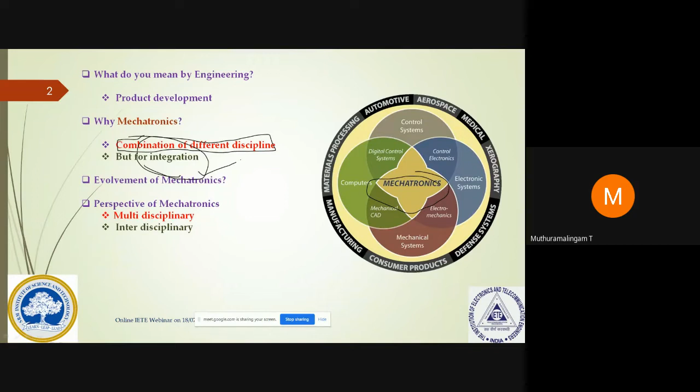However, the main important definition of mechatronics is not just this, it is integration. There should be some person needed to integrate the different engineering disciplines. It is not only combination, but how to integrate, because each and every engineering discipline has its own energy. If I want to connect mechanical with electronics, I simply cannot integrate them directly, because both are different forms of energy. So I need to introduce something which integrates both mechanical with electronics.

So in such cases, only mechatronics engineering is coming into the picture, and it is evolving in the right manner. What about the evolvement of mechatronics? Frankly speaking, in the last 20 years, people in all industries have been using mechatronics, but without knowing the name is mechatronics.

Even before 15 years, if anybody asked about mechatronics, people would ask, what do you mean by mechatronics? In my own experience, while doing my BTech and MTech in mechatronics, whenever we approached companies during placement, the industry people would ask which department we belonged to. We would say, sir, mechatronics. The first and foremost question we faced was, what do you mean by mechatronics? That was the condition once upon a time, but now the trend is changing.

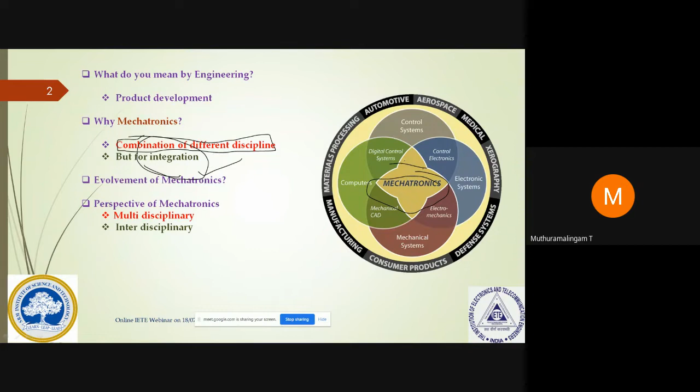Even here you may be able to see this - this is a digital control system, control electronics, everything combined together. This particular part belongs to control engineering as well as digital control system - it is interdisciplinary, a combination of departments which develops a newer perspective. Whereas multidisciplinary just takes the essence and integrates it. So mechatronics is multidisciplinary as well as interdisciplinary in some cases.

These are the definitions for mechatronics provided by various institutes - interdisciplinary, by the Applied Mechatronics Association, as smart electrical mechanical systems. By Chico State University, it's a field of study that combines fundamentals of mechanical, electrical and computer engineering. Then Clemson University gives their own explanation - the blending of software and hardware for design and analysis of advanced control techniques. Design with Microprocessors for Mechanical Engineers describes it as the science that integrates mechanical devices with electronics.

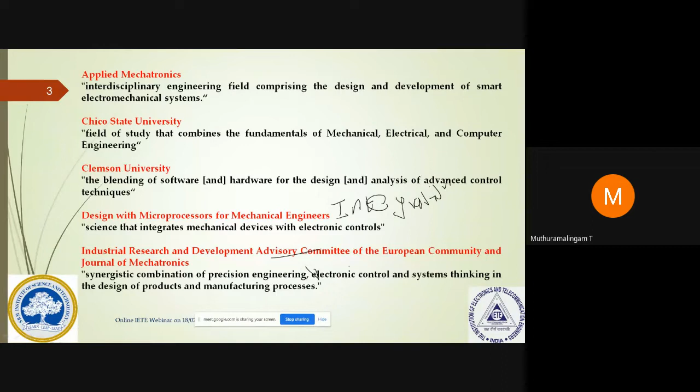While analyzing each different definition, the final concept is only one thing - integration. So if anybody asks what do you mean by mechatronics, instead of saying it's a combination of mechanical, electrical, electronics, we can say it is integration - integrating different engineering disciplines. And this is the French standard, actually, this is mostly accepted in mechatronics engineering - the French standard NF E 01-010. They state it is synergetic integration of mechanics, electronics, control theory, and computer science within the product design.

Actually, this is important. Integration is one keyword, and the second keyword is product design - I'm integrating to get some product in order to improve and optimize its functionality. As we already discussed, mechatronics is not purely multidisciplinary and also not purely interdisciplinary.

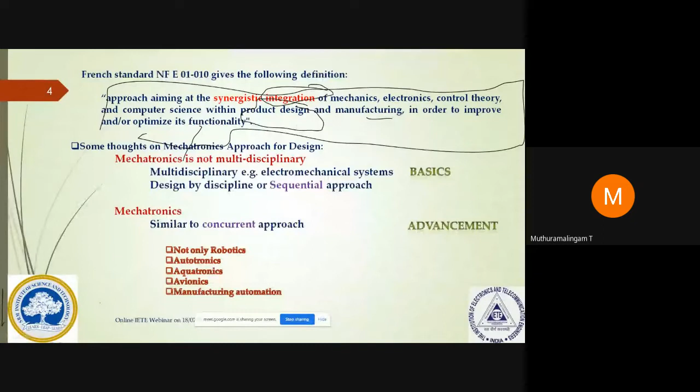What's the main difference? Multidisciplinary is a sequential approach - first complete the mechanical, then complete the electrical actuator, then go for electronics, then go for coding. There's a sequence for each different block. However, mechatronics is concurrent - I need to do the entire thing in parallel.

So generally, the sequential approach based mechatronics I can term as basics, whereas concurrent based mechatronics I can term as advanced mechatronics. These are general terms, not approved definitions - they are unofficial definitions for basic mechatronics and advanced mechatronics used by mechatronics engineers.

Also, if anybody asks what do you mean by mechatronics, they often aim only at robotics - dealing only with robotics. But it's not only robotics - automotive electronics, aquatronics, avionics, manufacturing automation, all come under mechatronics. However, as we know, out of these 5 categories, robotics now has a very unique as well as predominant importance among the technical fraternity.

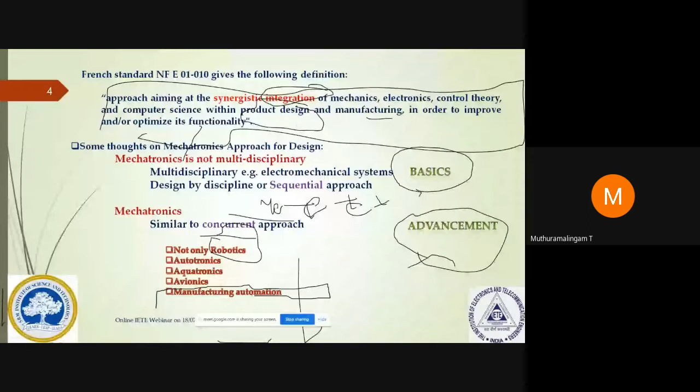Out of these 5, my specialized area is manufacturing automation. And for people going further, to interest some students, I want to show some video.

You just see the manufacturing automation. In manufacturing perspective, in machining side, what are all the mechatronics knowledge is needed? You just see that.

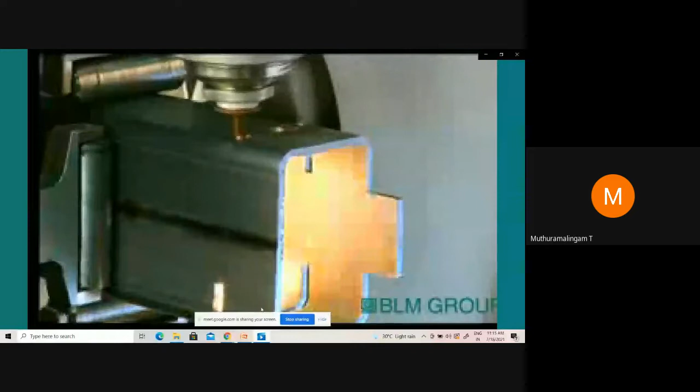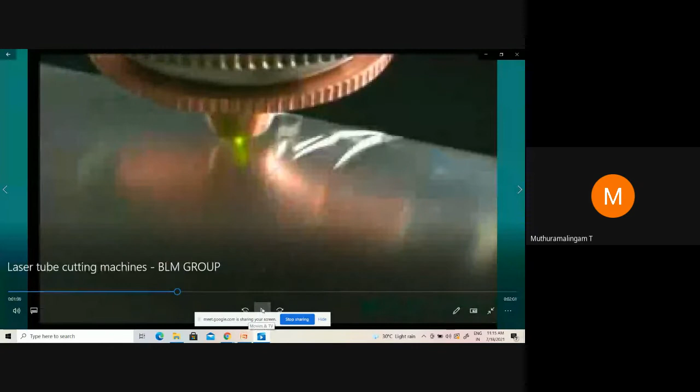This process contains not only the movement of the tool but also the tool trajectory for making an engraving, where the tool has to move, in which way it needs to move, what speed it needs to move, what should be the position. Each and everything is controlled by the mechatronics approach only.

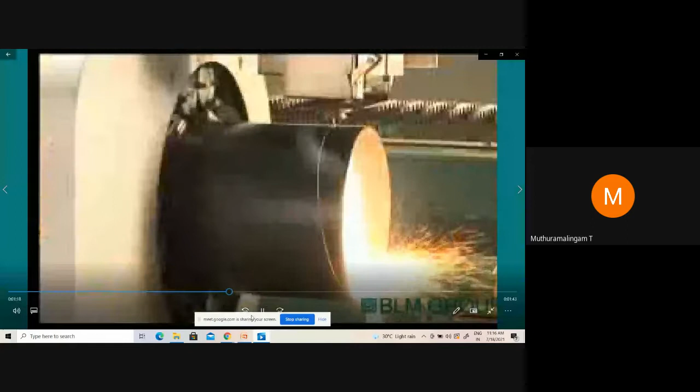And let me show about the Boston Dynamics robot animal.

You just imagine the stability. Actually, it is 10 years of hard work of Boston Dynamics.

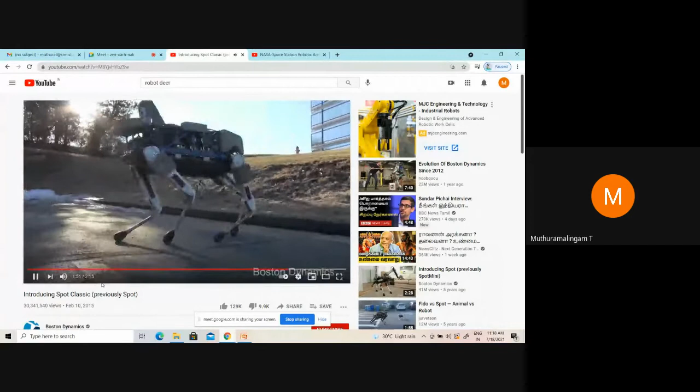And one more important example, which is told by even our today's guest, Professor Ramesh told. You just see that. A space station robotic arm. Actually, you know very well, International Space Station.

In International Space Station, whatever things are required for the astronauts available in the spacecraft, they will send through a vehicle. Those vehicles will be grabbed by the robotic arm, which will be on the outside of the International Space Station. They will take it and observe it.

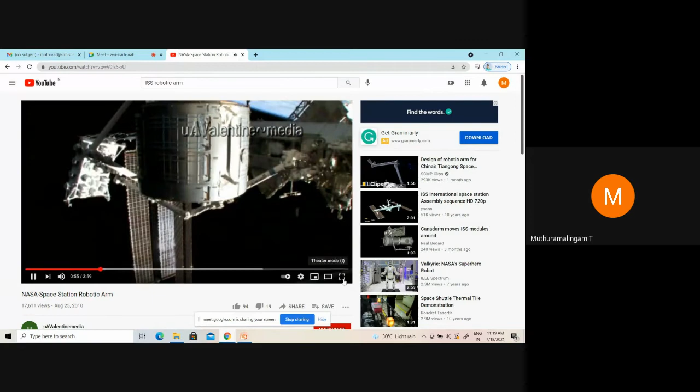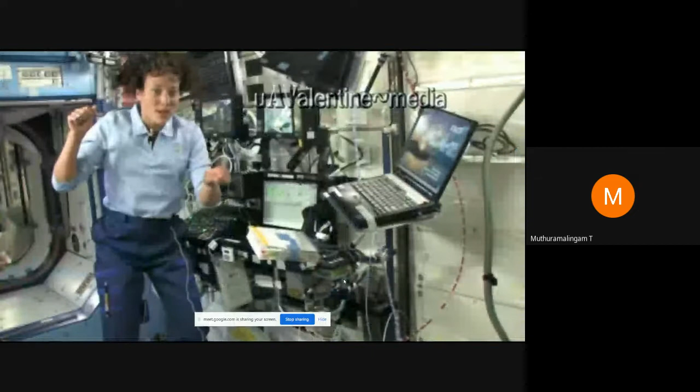It has extra joints, and I'll talk more about those joints. It also has the ability to move on the mobile base system back and forth on the truss and to do what we call a walk off, which is to go from one power data grapple fixture to another power data grapple fixture and basically act like a little inchworm. Grapple one, release the other, grapple again.

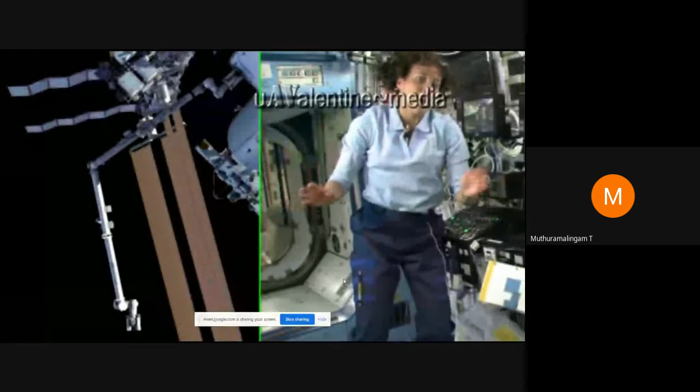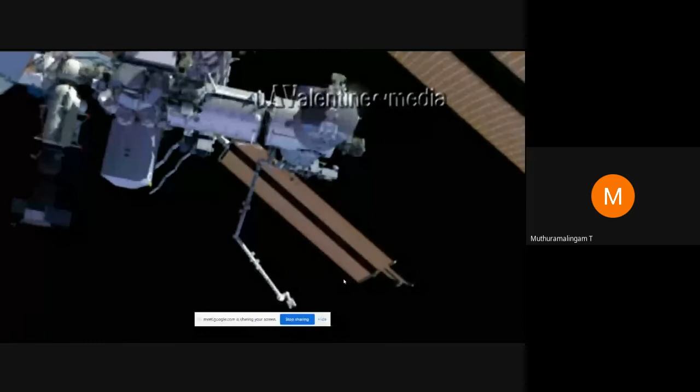The station arm has a shoulder, but that shoulder looks exactly like the wrist. In other words, one end is exactly like the other, and both are able to do roll, pitch, and yaw. That makes it so the arm can basically go in a big 360. The elbow, unlike my elbow, can actually go all the way, flip through straight, and come back on the other side.

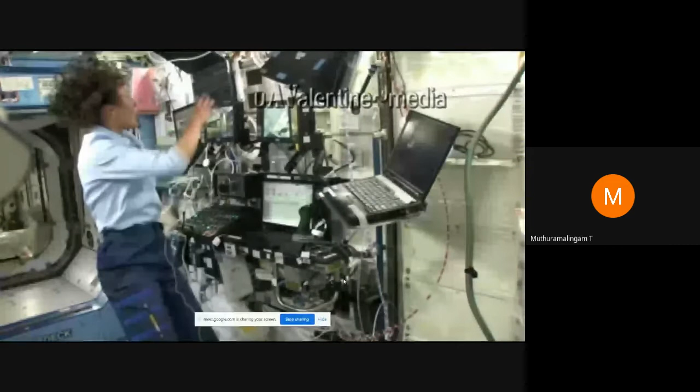This robotic workstation uses a lot of monitors because there are no windows that you can do your robotics out of. We also use computers. Some of them are used for our procedures. Some are used for additional views. And some are used for a computer program that is basically like a virtual reality.

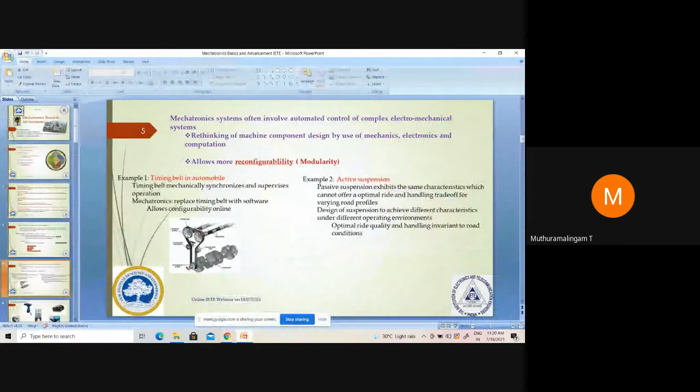Okay, so those are some real-time examples where mechatronics exists. So mechatronics often involves automated control of complex electromechanical systems. It's rethinking of machine component design by use of mechanics, electronics, and computation.

And this is the main important characteristic of mechatronics: reconfigurability. It can also be seen as modularity. Even we have this concept of modularity kitchen, modular kitchen. Modular kitchen is nothing but whenever I want to change the interior decoration of the kitchen, I can change it. I can upgrade whenever some new technology comes. I can upgrade myself, upgrade the kitchen.

The same way, as we know, any product, based on customer requirement, every year the product need is changed. Every year, even the iPhone, they are releasing new editions. How are they inventing new editions? They keep observing the customer requirement. They get feedback from the existing user, from them. What are the things we still need to change? Like that, they ask the customer. Any customer is the end user. They let them know, okay, these are things we still need. So based on the need of the customer, every time I need to upgrade. So that is known as modularity, as reconfigurability.

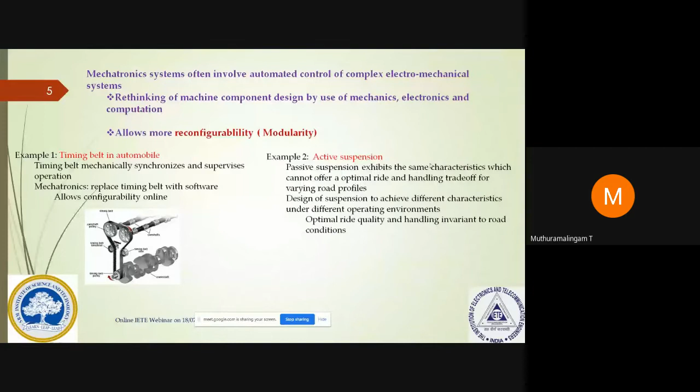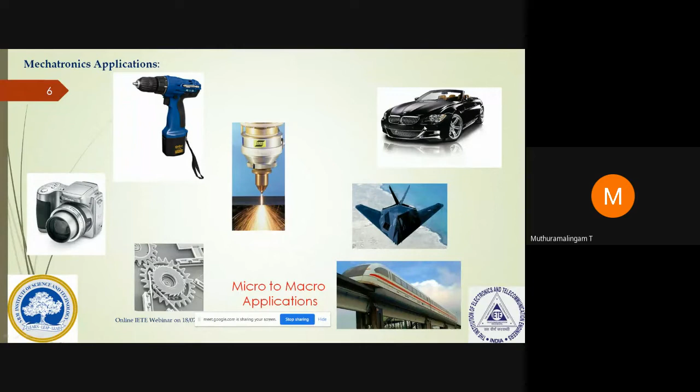We are getting some very favorable results. And these are all the mechatronics applications, from micro to macro level. From micro to macro level, there is speed available. The tool side, automotive focus camera, gears, micro MEMS technology, machining technology, car, stealth bomber, high speed train. Wherever you go now, mechatronics is coming into the picture.

In micro machining, this is a desktop sized factory. It's a machine, the CNC machine drilling image. It's a desktop type factory which can build a small part with a small factory. So if I need to make a very small minor product, why do I need to spend a huge amount to purchase a full CNC machine? Instead of that, why can't I purchase a small desktop size factory? By using those concepts, this is coming into the picture, and this is a micro factory drilling unit.

It's a drilling unit. Actually, it may look like a motor, but actually it's a drilling unit. We may see a larger drill available in the conventional lathe, but using piezo, why can't we make a micro factory drilling unit using that concept? This part, this thing.

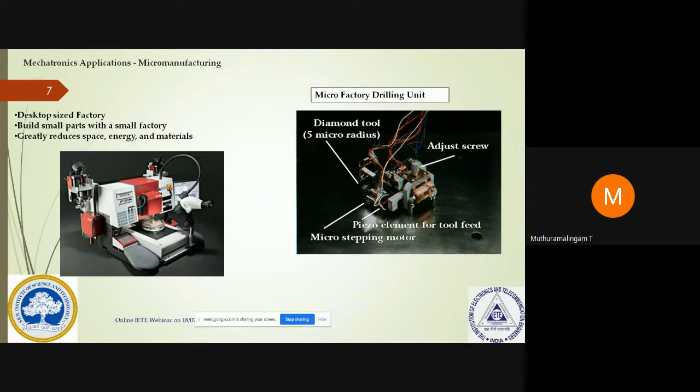Transportation. Most of the people studying mechatronics, at least one student every year attempts this particular project as a major project, making a Segway. Making a Segway is easy, but maintaining the stability is a matter of fact. Even many students are still attempting to change the control algorithm to give a better result. Still, many students are working on it.

And as you know, the car, brake-by-wire, steer-by-wire, integrated vehicle dynamics, camless engines, integrated starter and alternator. Now they want to reduce the effort made by the driver and give a very sophisticated experience to the passengers.

Now they are implementing this. And this is a Maglev train, which is in Japan. It's a fully automated train, which can run 574 kilometers per hour.

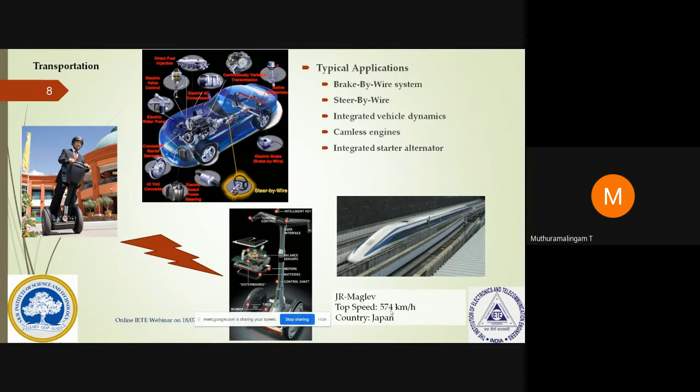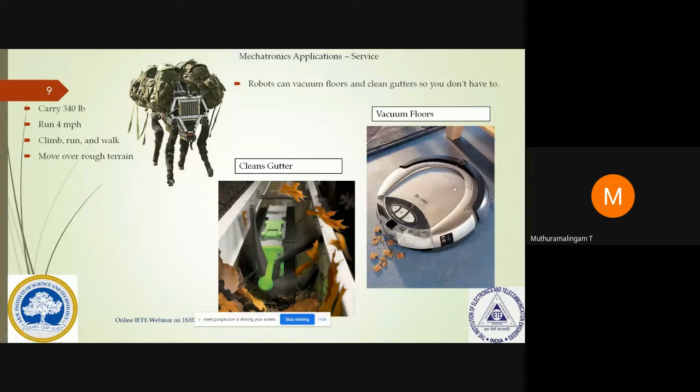Not only in the bigger applications, even service robots, even for vacuum floors, you can see the clean gutter and vacuum floors. Nowadays, it's automated, even now it is available in the market itself. Automated mechatronic assisted vacuum floor. You need to purchase it, simply keep it on the floor. Whenever it senses any dust, it will turn on and absorb the dust. Now I think many homes have this automated vacuum floor.

And in the medical field, the prosthetic arm, by replacing the hand and leg. Even one of my MTech students did a magnetorheological fluid based prosthetic arm, and it was working well. Now we are doing some auto tuning. Once it gets better, we are ready to apply for the patent also.

And this is the robot, very well. NASA now recently has sent vehicles to Mars, and underwater robots. And this is the one we have seen, the International Space Station robot. Here's how mechatronics works.

As Ramesh sir pointed out, here not only electronics is a matter of fact, choosing the material is also a matter of fact. The material must withstand all the possible difficulty and constraints it is facing. Say for example, take the underwater robot. As you know very well, underwater, for every 10 meters of depth, 1 bar of pressure will increase.

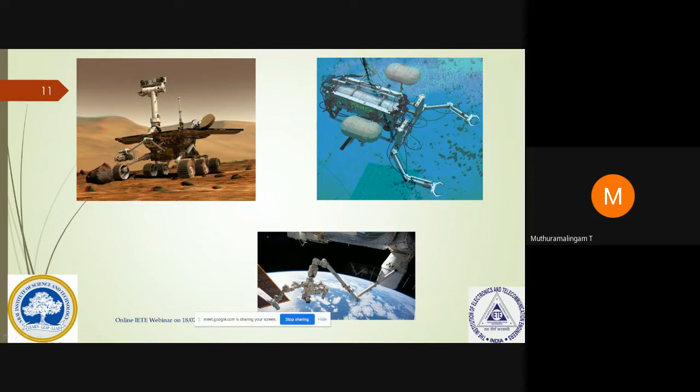Now, a very basic thing: what do you mean by mechatronics? Generally, mechatronics consists of mechanical systems, electrical systems, and information systems. It indicates all the electronics as well as control instruments and coding computer systems. So any mechatronic system will consist of a mechanical system, electrical system, information system, and computer systems.

However, we mostly deal with modeling, simulation, automated control, and numerical control. Why? Because if you want to upgrade the mechanical system, that's not a mechatronics engineer's duty, it's a mechanical engineer's duty. If you want to upgrade the electrical part, that's electrical engineering's duty. If you want to change anything in the information system, that's a CSE engineer's duty—computer science will do that. Whereas modeling and simulation are automatic. For doing this, we have to know the essence of each and every system.

So most mechatronics engineers will be hired by core companies to work in these areas only: modeling or simulation, analysis, automatic control, and numerical control for optimization. So in general terms, mechatronics is nothing but a mechanical system, an electrical system, and a computer system.

Since a computer deals only with digital, whereas here it is analog, digital-to-analog and analog-to-digital converters will be implemented, along with electromechanical and real interfacing. So simply in terms, this can be termed as basic mechatronics.

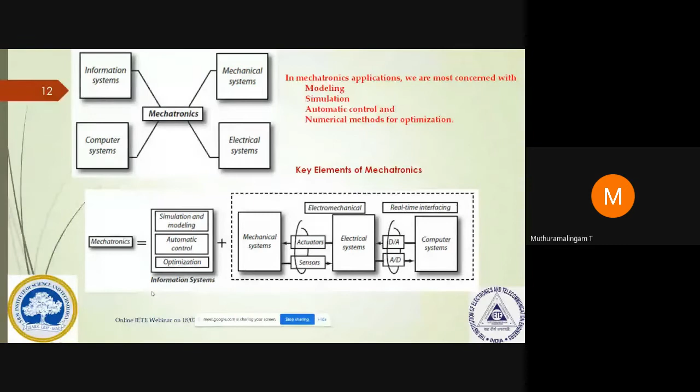Even our title for today's topic itself is basics to advancement. So mechanical, electrical, computer science, some real-time interfacing with actuators, sensors, digital-to-analog, analog-to-digital—we can term this as basic mechatronics. But apart from this, we are implementing some simulation and modeling, automation and optimization. That means more information system in terms of artificial intelligence also. We can term this as advanced mechatronics.

Regarding actuators, as you know well, there are 4 conventional actuators: hydraulic actuators, pneumatic actuators, mechanical actuators, and electrical motors. But...

If we want a very precise movement of any system, say for example I need 1 micrometer movement—1 micrometer means our human hair is about 20 micrometers average thickness. We would need to cut our human hair into 20 pieces, just to imagine that thickness. I'm telling you this for students, not for eminent professors. For students, that very minimum level of movement needs to be obtained.

We need to go for a smart actuator. However, controlling the movement of a smart actuator is not that easy. The signal conditioning needed for smart actuators is PhD-level work. Even in our department there are 4 students doing research on how to improve signal conditioning for smart actuators—2 are working with shape memory alloy, 1 with piezoelectric, and 1 with electroactive polymer switch.

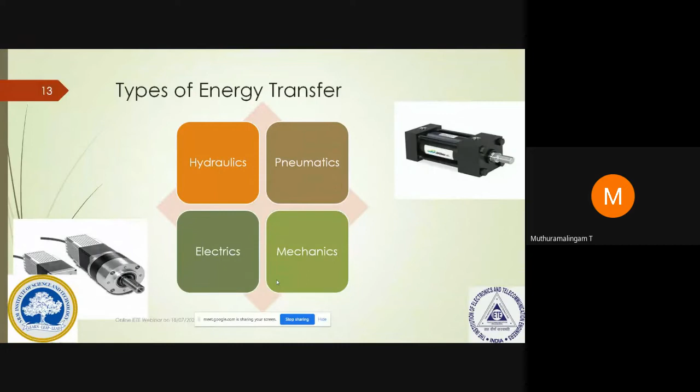So these are the very conventional actuators: hydraulic, pneumatic, mechanical, electrical. Whereas apart from the conventional, the new unconventional thing is the smart actuator. Why do we need to study this? As a manufacturing or production engineer, whenever we want to implement actuators, we need to know which actuator is needed—whether hydraulic, pneumatic, electrical, or a simple mechanism. For that purpose, I need to know the advantages, disadvantages, and comparison of each actuator.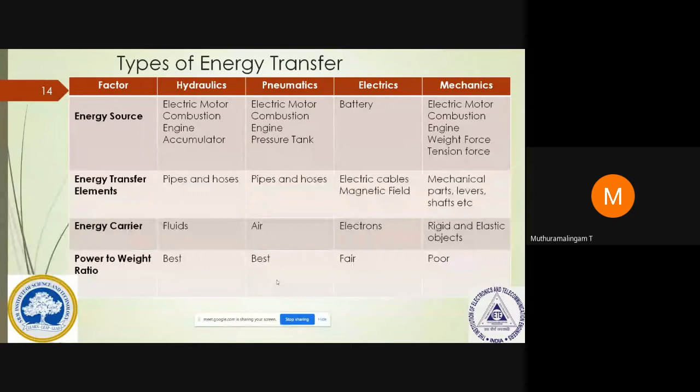So generally, in terms, people will say: whenever you want very high torque, go for hydraulics. If you need a clean environment, go for pneumatics. If you need lower cost, go for mechanics.

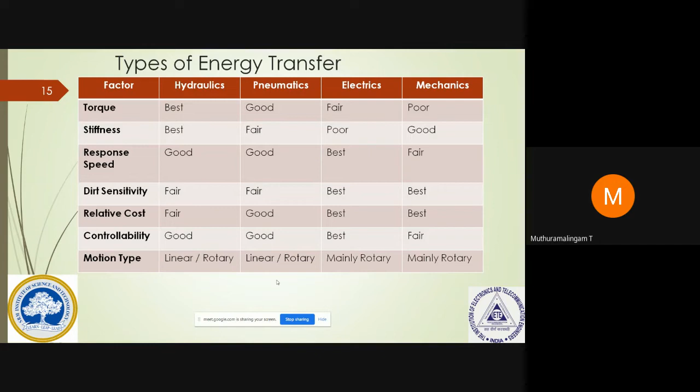I need a high power with a somewhat compromised level of cleanliness, okay, go for electrical. I need very high precision of movement, go for smart actuators. So in this way only we need to select actuator. However, first of all, we need to know the comparison of each and every actuator.

And we can do the direction control, we can do the speed control, we can do the position control. Whereas among these three, those who want to be really a mechatronics engineer, my kind advice, concentrate here. Nowadays there is plenty of international funding being provided for this particular technology, which is called position control.

If you are able to get a micron level of movement with a precise level, okay, we can apply for many international funding. They are ready to fund it, but they are expecting whether we have the caliber or not in that manner.

And open loop, closed loop, adaptive control. I hope most of you electronics engineers know the difference between these two. Simply in terms, open loop doesn't have any feedback. Closed loop has feedback. The main difference between these two is the controller.

So in engineering perspective, we use the term control law for the required output. Control law fixed by the manual is closed loop. At the same time, control law fixed by the system itself is adaptive control. For example, you are fixing 23 degree or 24 degree.

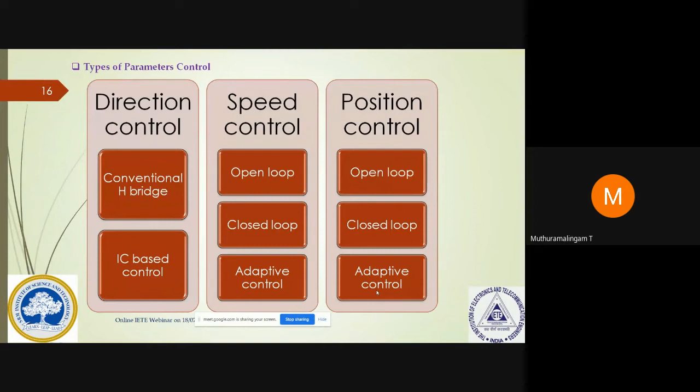Once again, I am telling this for the students, not for the eminent persons. Okay, and simulation is execution of the model.

As I already told, if we adopt some simulation optimization algorithm, then only the basic mechatronics can be converted into advanced mechatronics, as we know very well. So simulation is execution of a model that can be manipulated logically to decide how the physical world works.

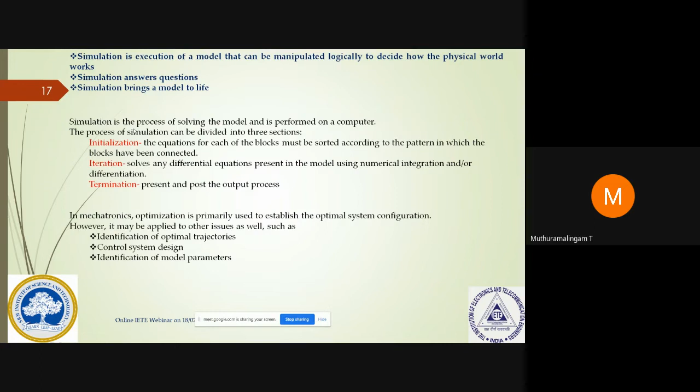Simulation sometimes answers a question immediately. If not, you need to wait more time. Say for example, Sir Isaac Newton. The apple accelerates, why? Maybe a force acts on everything. He didn't have clarity, but he took this assumption and was working on it for nearly 10 years.

I read some article that said after 10 years only he came to the conclusion, okay, there should be something like gravity available. But thing is, if it's simulation, it answers the question immediately. It saves your time, reduces your effort.

And simulation brings a model to life. Generally what we do in simulation is, simulation is a process of solving the model and is performed on a computer. The process of simulation can be divided into three sections: initialization, iteration, and termination.

So in mechatronics, after simulation is done, we need to do the optimization. What do you mean by optimization? It means getting the better result. What are all the possible input combinations by which I can get the required or better output? That is optimization. So optimization is primarily used to establish the optimal system configuration, when my system will work in a proper way.

What are the input parameters to be set by the operator? Even though it is automatic control, what parameters need to be set during operation? That will be determined by the optimization.

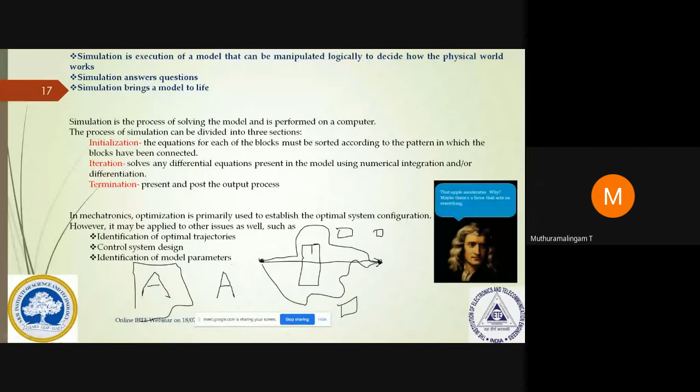That will be decided by the online simulation as well as the optimization tool. So in general terms, as I already told, a process sensor will let you know whether the required output is happening or not. If there is something different, it will let the computer know, okay, something is different.

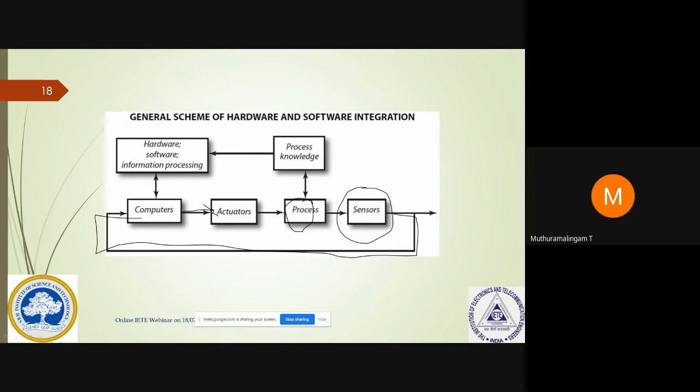So it will actuate based on that. Now it is next generation, it's process knowledge. Without the operator itself, how the machine can work, that is artificial intelligence. Now we are entering into the next level.

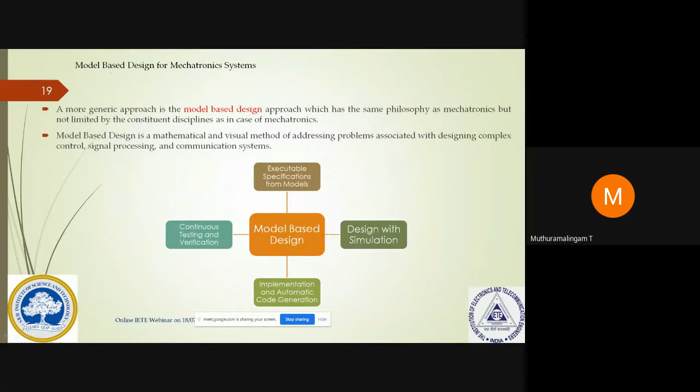Before developing one product, first of all I need to make a simulation analysis, as we said. So this is the general design we are using in mechatronics, it's a model-based design. I will convert the product I need to develop into some mathematical equation, then I will develop the model, then I will check whether the system will work within a requirable limit with the tolerance or not.

For that, I need to get the model of that particular component. If I want to make an electrical active suspension system, first of all I need to derive the equation behind the active suspension system. We have to make a Simulink or Simscape model, and check whether it is providing the proper output or not. Then we can go for the deployment. So it is a generic approach, the model-based design approach, which has the same philosophy as mechatronics, but is not limited by the constituent disciplines.

I think model-based design is not only used in mechatronics, nowadays all engineering disciplines are moving towards model-based design. So model-based design is a mathematical and visual method of addressing problems associated with designing complex control, signal processing, and communication systems.

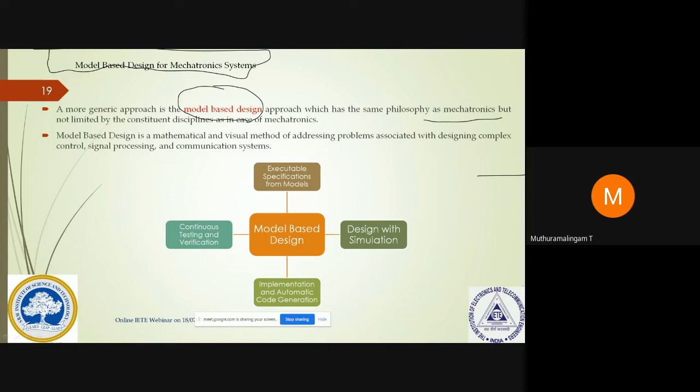So what do you mean by TRL? Technology Readiness Level. Generally, before making any product, this goes from idea to final product. Number one is the idea, why I can't make the product. Number nine is the real product.

So before making the final product from the idea, it needs to cross totally three phases. What are the phases? Research, then development, then deployment. So in research, I am giving some idea whether it will work or not. For that I need to do detailed research, so basic principles are observed, then the technology is formulated, and experimental proof of concept needs to be done.

Once it is convinced at this stage, only then do we need to go for development. Even in development, we will not go directly to the product. First of all, we need to make some prototype, then we need to validate the prototype. If the prototype is working well, then we will go for the relevant environment.

That means here maybe some 2 prototypes, here there's some larger sample of prototype, then only a system prototype demonstration in operation environment, system complete qualified, finally only deployment will be employed.

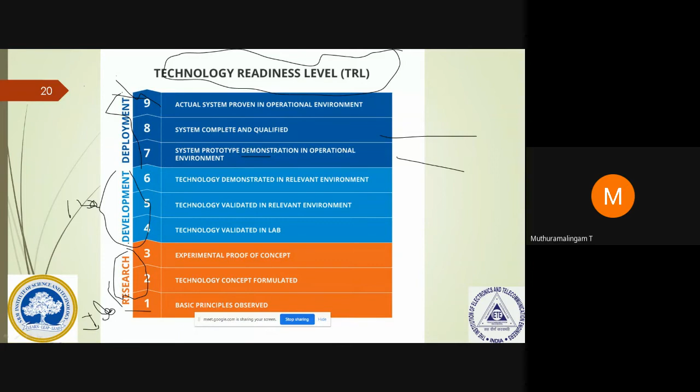So now we need to relate those TRL with mechatronics. So now we are modeling. Say, for example, I need to make an active suspension system. First of all, I need to identify what is the need.

Then conceptually, the design needs to be made. That means some functional specification, assumed functional specification. Then third point is basic modular mathematical modeling, that is mathematical modeling of a particular system. Then add sensors and actuators. Then detailed mathematical model, exact.

Here it may contain only the mechanical blocks or physical system. But after incorporating sensors and actuators, a detailed mathematical modeling is done. That will be checked.

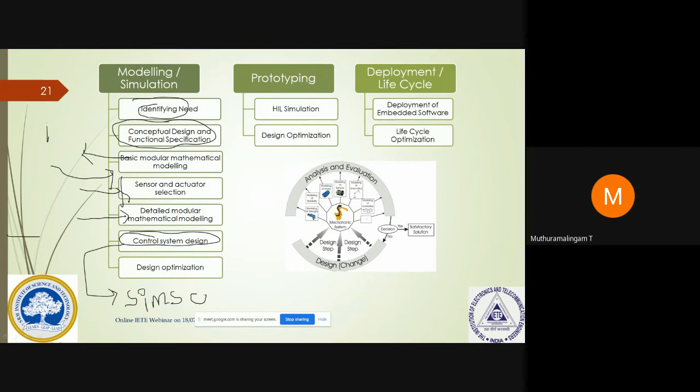Then I need control system design. That will be checked. Say, for example, I am using Simscape. I think as electronics engineering students, you know the difference between Simulink and Simscape.

Simulink deals with only mathematical equations. It will not consider any physical model. Whereas in Simscape, there are already physical models incorporated based on the mathematical equations. We need not write our own mathematical modeling.

As you know very well, if I want to make a motor in Simulink, I need to take equations, which is a big task for a DC motor, I need to do all that. If it is Simscape, we can directly take the electromechanical devices option from the library and do whatever we want. That you know very well.

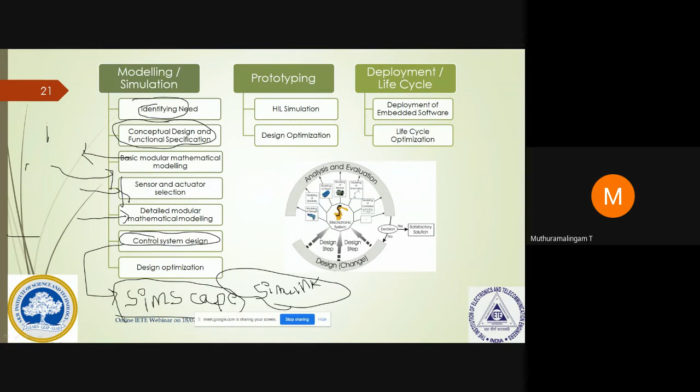So in Simscape and Simulink, we are doing many things, and I am implementing my control algorithm. Then I check whether it is virtually working or not. Virtually, I am checking whether it is working or not. That is known as SIL/MIL.

That means model in loop system, software in loop system. What will it do? It will model, I will convert the mathematical modeling of the system. Then while I incorporate my control algorithm, I will check whether the coding, the imparted coding, is working or not. That is termed software in loop system.

Previously, once you got a favorable result, they would go for a prototype. Once the prototype is working, then they go for deployment. So first they do the model in loop system, then they do SIL, software in loop system, and check the coding. Then they make the prototype. If the prototype is working, they go for deployment.

Actually, why are we doing simulation? Because engineering is a product. Previously there was a trial and error method. Some concept would come into the mind, I would make the model, make the prototype, make the final model. It won't work.

What would I do? Again I need to start from the first step, make some smaller changes, check whether it's working or not, make the prototype, then go ahead. So the number of attempts for trial and error is more.

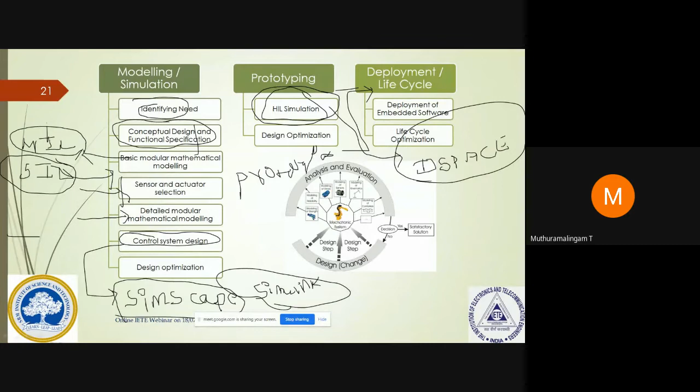Now I understand that you will realize the difference between what is the need of model in loop, what is the need of software in loop, what is the need of hardware in loop, and human machine interface. So human machine interface is nothing but a facility by which the bidirectional transfer of information required for the system operation happens from machine to human as well as human to machine. So these flows are independent yet linked.

So generally the human will communicate with the machine or machine with the human in terms of some discrete signal, because the machine is basically a digital machine which can only get digital signals, whereas the human is able to understand from some alphanumeric diagrams or animated diagrams from the machine.

So what are all the signal transmissions? Acoustic, optics, and haptics also. I think now we are going to the new era of haptics technology, bionics, motion, and even the autofocus camera. Whenever you raise your hand and simply say something, it will take a snapshot. That is motion based.

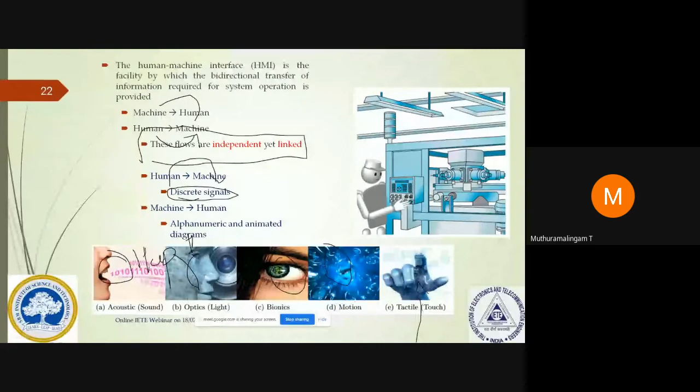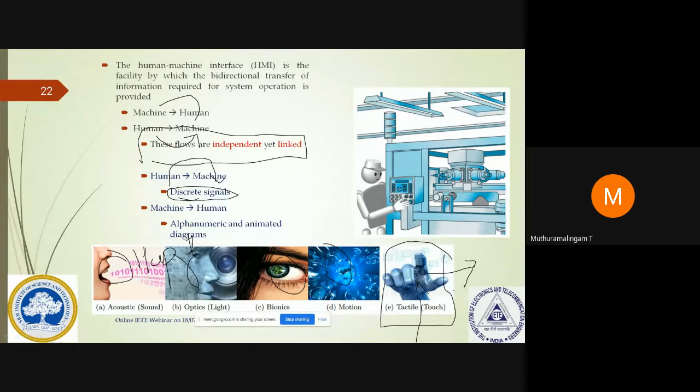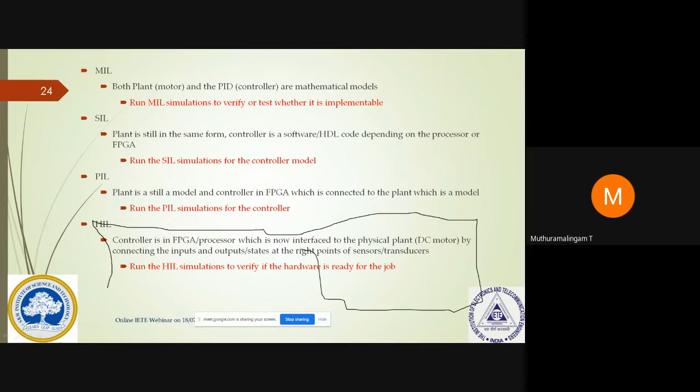And this is one way of telling it. First, generally, what do you model? I need to make a mathematical model, that is MIL. After MIL, I will impart some coding, to check whether it's working or not, that is known as SIL, that means software in loop system. If it's working better, then go for hardware in loop system. So hardware in loop is a controller which contains a field programmable gate array based processor, which is now interfaced to the physical plant by connecting the input at the right point of the sensor and transducer.

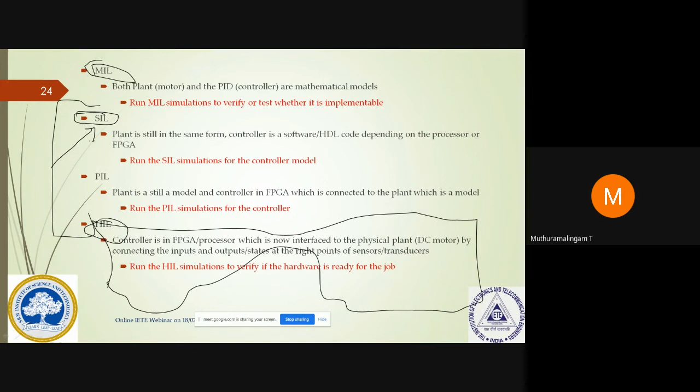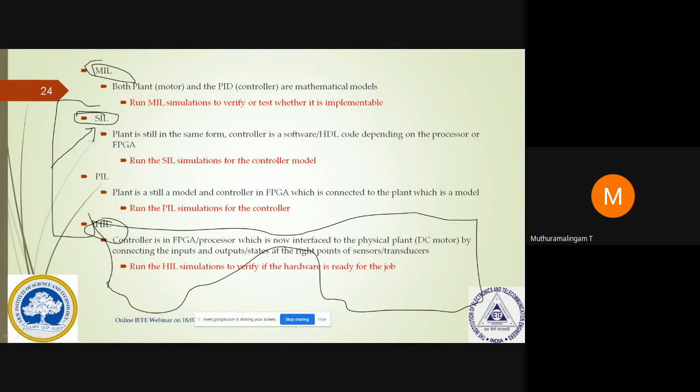So out of these MIL, SIL, and HIL, there is really a valid need among people. Even whenever we are visiting some companies, they are looking for mechatronics engineers, they are expecting mechatronics engineers. They need to know basically MIL and HIL, at least MIL they are requiring. That means if I'm giving some system, they are expecting that the students know how to find the equation for the same system.

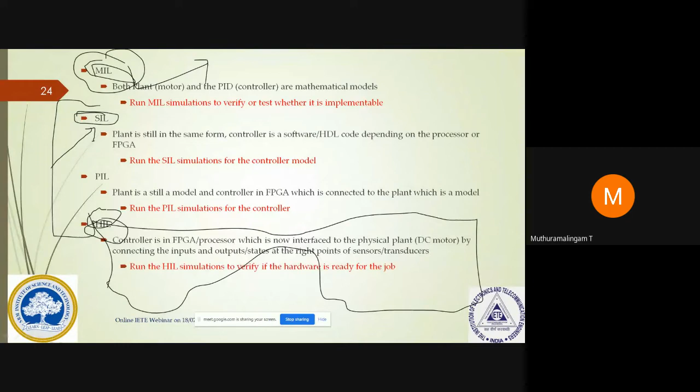If the students know those things, okay, I can train them in other aspects, just like software in loop or PIL in loop, HIL loop. I can train the students. However, I need students to have the knowledge of making the model-based design. Nowadays, plenty of industries are looking for this type of MIL only.

And remember this thing, I need to tell this. As per the research philosophy, there is a lot of difference between knowing something and knowing the name of something. So always know the something, not the name of the something.